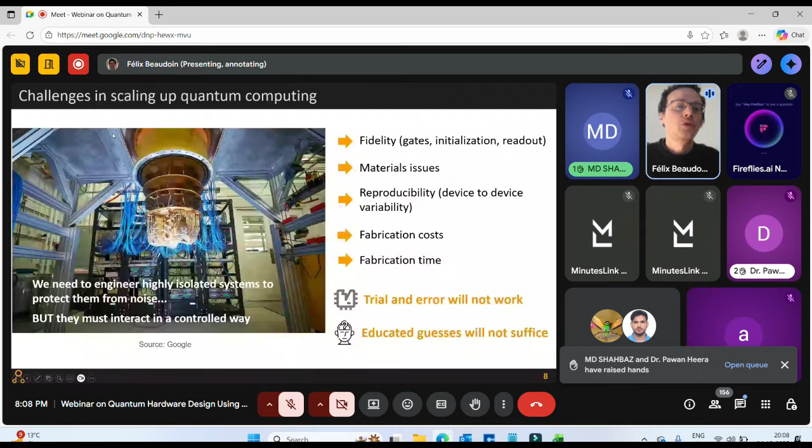So that's a very difficult engineering challenge. Our vision is that computer-aided design software can help to get there, just like in classical electronics industry, where engineers have been using TCAD, technology computer-aided design software, for decades.

In TCAD, the idea is to start from a real device that is industrially relevant, such as a MOS device, create a 3D model with an arbitrary topology, and solve some classical or semi-classical physics models to get experimentally relevant performance metrics, such as an IV curve for a transistor.

In quantum technology computer-aided design, so QTCAD, we again start from a real device that is industrially relevant. It could look very much like a transistor. In fact, spin qubits are fabricated with the same techniques, but now we need to solve for much more deeply quantum mechanical models that include entanglement, superpositions, and many other phenomena that are absent from conventional TCAD software.

And then the users, at the end of the day, will care about very different performance metrics. They don't necessarily care so much about current voltage characteristics, but they care a lot about how fast can I do a quantum logic gate. So can we model Rabi oscillations, for example, in these TCAD software?

So the idea here is that conventional TCAD software, while excellent for its applications, is not suitable for quantum hardware design. So we have to develop new software capabilities to really accurately model the performance metrics that matter to quantum technologies.

So our competitive advantage as Nanoacademic in that respect, we think we have three main broad categories of advantages. The first one is we developed our own adaptive meshing algorithms. This is true in many TCAD software, but to achieve user-defined accuracy targets.

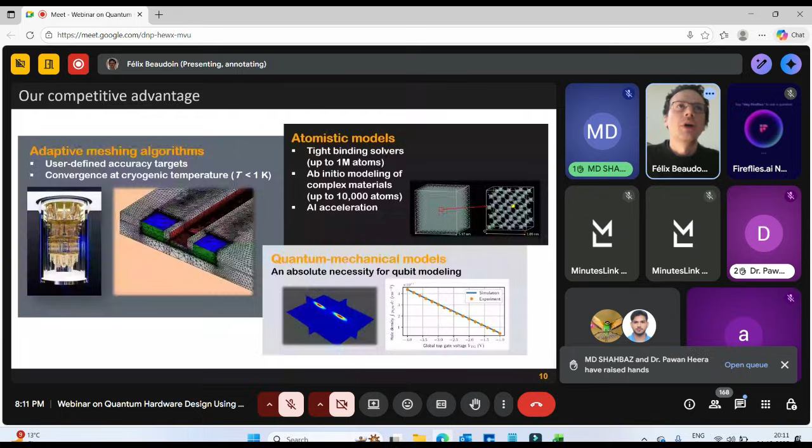And the final competitive advantage is we have these quantum mechanical models that are encoded directly into QTCAD that are absent from conventional TCAD software. That's an absolute necessity for qubit modeling. So with this introduction done, I would like to describe some use cases of QTCAD.

First, who are our users and collaborators? We have users, typically scientists and engineers in academic, government, and industrial environments. We developed QTCAD thanks to several R&D grants from the governments of Canada and Quebec here. And we have R&D partners and customers across North America, Europe, and Asia.

And we also collaborated with the National Research Council in Canada to develop a lot of QTCAD and QTCAD use cases. So we have commercial users of QTCAD from industry and academia since 2023. And of course, for our DFT software, this is a much longer story that dates back to 2007 or 2008, the foundation of the company.

There's a growing list of publications using QTCAD. You can find links to those publications on the Nanoacademic website. Some of the publications come from ourselves, but in the last year, actually, our users got better than us at publishing. So with QTCAD, they now have several publications in high-impact journals such as Physical Review Letters or Applied Physics Letters or PRX, Nature Communications, Scientific Reports.

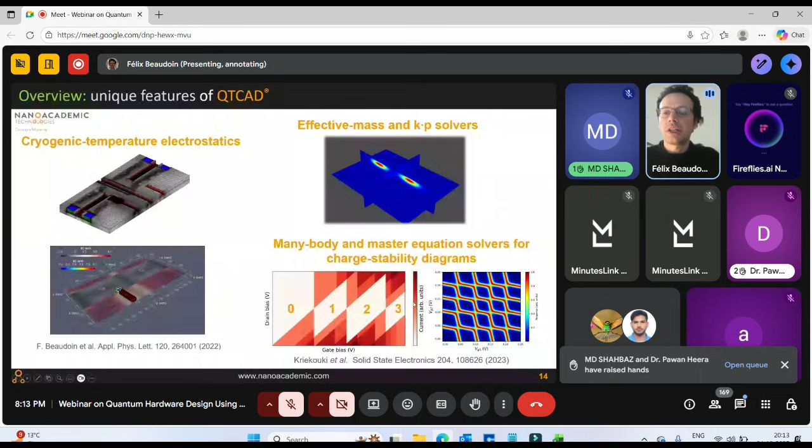We have many-body and master equation solvers for charge stability diagram calculations to evaluate if certain gate bias configurations and geometries are able to capture 0, 1, 2, or 3 electrons, for instance. We have a valley coupling calculation feature, which is absolutely important for silicon-based quantum dots, advanced spin physics, quantum well physics, and a Rabi oscillation module to predict how fast quantum logic gates can be done in a given system.

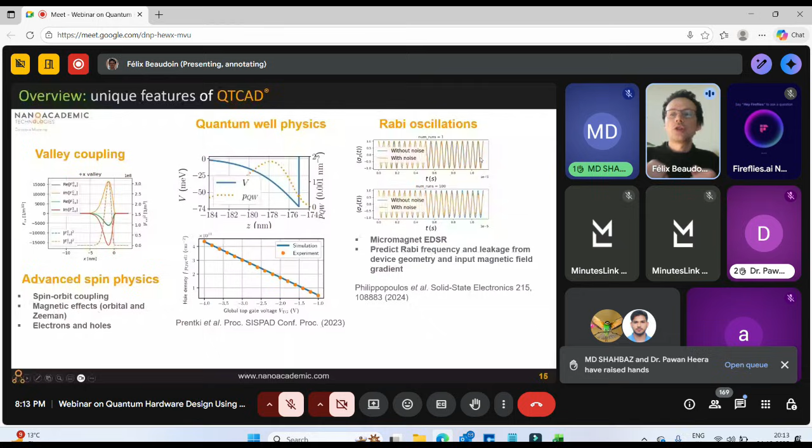We also have, for double quantum dots or multiple quantum dots, the capability to calculate the strength of tunnel coupling and exchange. These are resources for 2-qubit gates in particular, or even single qubit gates in some exchange-based spin qubits. So that's very important in order to assess how fast a quantum computer could be based on spin qubits.

We have a non-equilibrium Green's functions module to calculate tunneling, sequential tunneling currents through quantum dots, and many additional features.

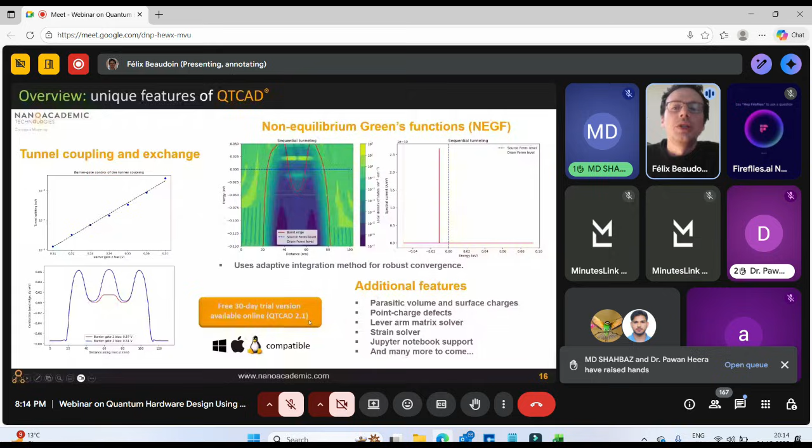Since QTCAD 2.0, we also support atomistic simulations directly in QTCAD for specific materials, namely silicon, germanium, silicon oxide, silicon germanium alloys. We'll add materials as we keep developing the software.

But the idea here is that we're able to do multi-scale simulations where we use continuum models to model the electrostatics of the device at the micron scale. But at the nanometer scale, we can zoom in the quantum dot region and model the quantum dot atom by atom and find the electronic structure of the quantum dot with atomic resolution.

And this is absolutely crucial to study accurately valley physics, spin-orbit coupling, g-tensor calculation, strain, and eventually shuttling calculations, and device-to-device variability phenomena arising from rough interfaces, random alloying in those devices, and also some potential for individual dopant impacts.

So this will be extremely important as the spin qubit technology evolves and scales up, because these device-to-device variability effects are an obstacle to scaling. So studying them with computational methods is absolutely crucial.

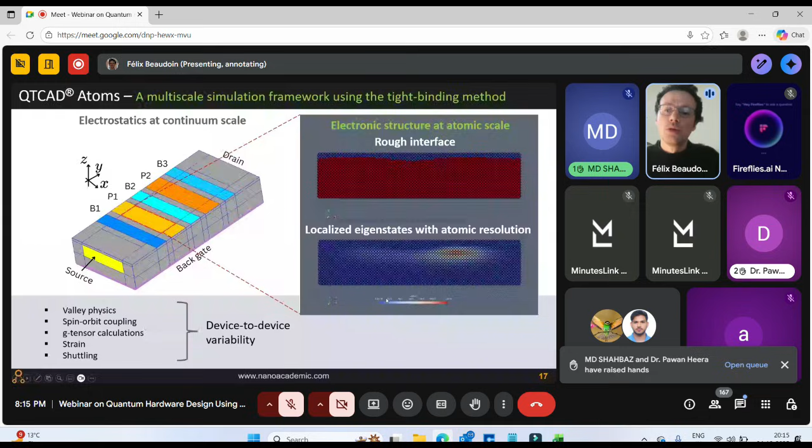When it comes to superconducting qubits, it is possible since QTCAD 2.0 to model superconducting circuits using QTCAD. We will see an example in this presentation. We can do capacitance matrix and Maxwell eigenmode calculations, but also with NanoDCAL and RESCU, it is possible to do atomistic simulations of Josephson junctions.

So because we can handle both the atomistic scale and the macroscopic scale of capacitors and resonators, we have the capability with Nanoacademic software to calculate all parameters, capacitance matrices, Maxwell eigenmodes, couplings, Josephson energies, all relevant parameters that come into the Hamiltonian that describe superconducting qubit QPUs. Once these Hamiltonians are obtained, it's possible using open source software such as scqubits or QuTiP to calculate chip performance figures of merit.

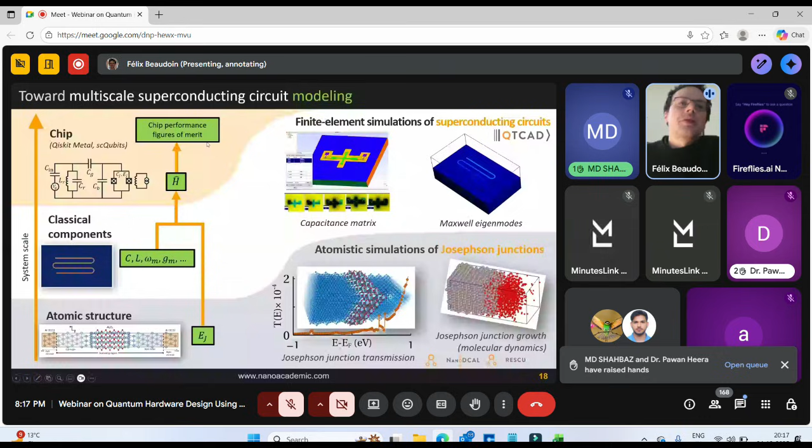I'd like to go into more concrete use cases. Last year at the March Meeting in Anaheim, our users Equal1 announced that they had built this new quantum computer called Bell-1, which contains a 6-qubit QPU, and this was operated live at the March Meeting. The computer is small enough to fit in a standard data center rack and can plug in a standard 120-volt outlet, which makes it unique. Very few quantum computers can be operated this way.

And I'd like to mention, it's now a preprint, but we hope it will be published very soon. If you go to the preprint link and you look at figure 1, the way they explain how the quantum chip works is partly thanks to a QTCAD simulation. So this is proof that they're using QTCAD in their day-to-day design of chips that go into actual quantum computers that are now commercial.

I'd like to mention another concrete use case from Equal1 again. This is accepted in Scientific Reports. The manuscript is available and will be officially published, I think, in a matter of days. The same company studied GlobalFoundries 22 nanometer fully-depleted silicon-on-insulator technology. Everything was fabricated by GlobalFoundries with standard techniques, but the topology was modified to create a quantum dot array.

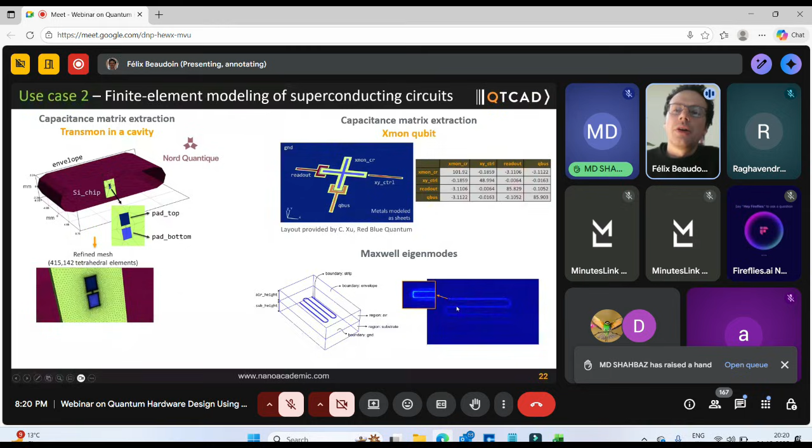We did a similar capacitance matrix extraction for an Xmon qubit provided by another Canadian company called Red Blue Quantum. And we also did Maxwell eigenmode calculations. So in the hands-on session, I will show you how to do this kind of calculation with QTCAD and Qiskit Metal, which is a GUI for those kinds of superconducting qubit simulations.

I also want to briefly mention that QTCAD is used not only in research and engineering, but also increasingly in education. We have educational licenses available, and this has been used in teaching at Politecnico di Torino in Italy, and more recently at University of Toronto in an electrical engineering class on quantum hardware design.

So let's go into the more live demonstrations. Spin qubits in semiconductors first. We will concentrate on a simplification of an FDSOI device to make the simulations run faster and make the presentation more pedagogical. How this will work is we will start from a layout that describes the structure. So I'll open the layout in KLayout. We have it here. There are multiple layers that define the structure. I will hide some of them.

First, the domain. This is just a rectangle that describes the simulation domain. So you can see the dimensions here. It's in the hundreds of nanometers, about 100 nanometers. And this is, of course, a subset of the full chip, but we're interested in the region where the quantum dot is going to be formed. There will be a film layer, which describes 4 regions. Here's the source, the drain, the channel, and the shallow trench insulators on the sides.

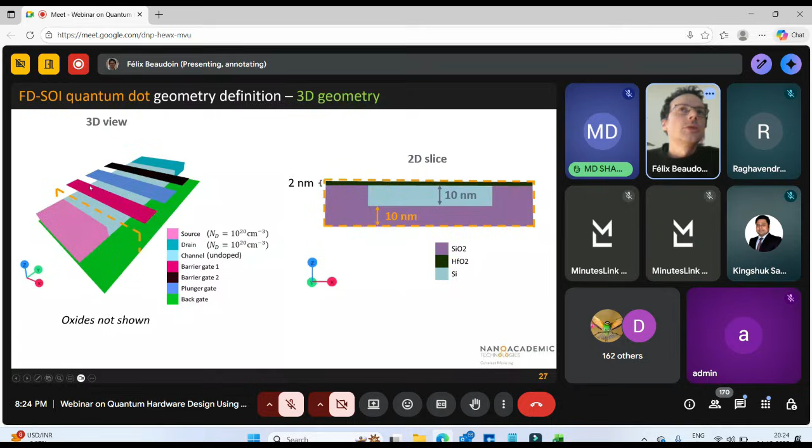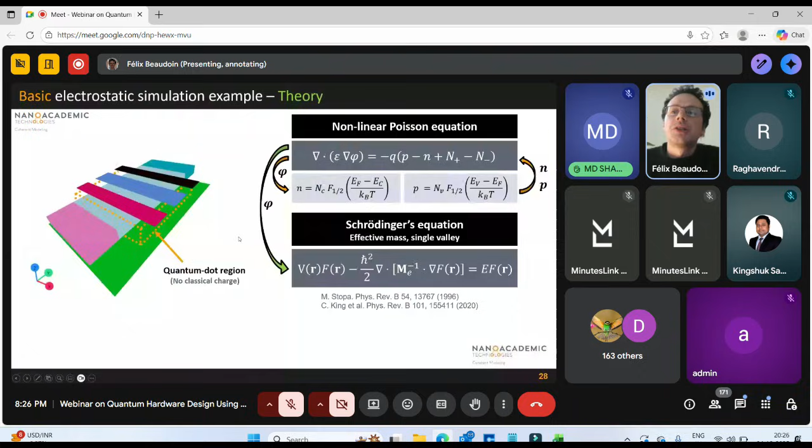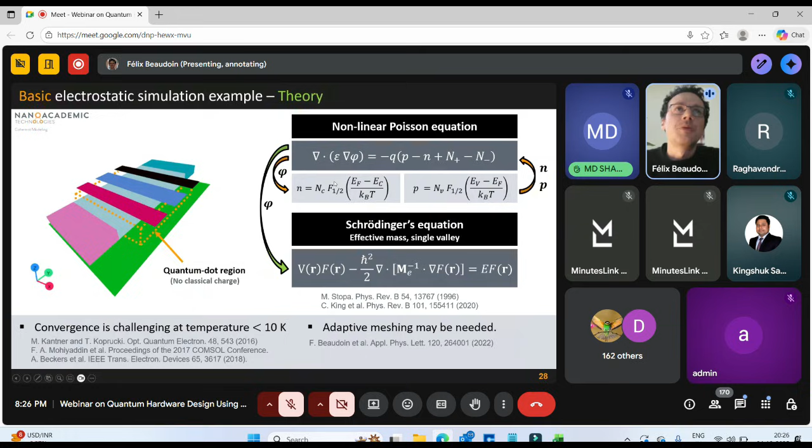This is a notoriously difficult problem to solve because the nonlinearities associated with the electron and hole charges are much stronger at cryogenic temperatures. So adaptive meshing may be needed for robust convergence, and that's something we describe in this paper. So that being said, let's jump into the code and do the demo.

So I'm going to open this interface to one of our workstations at the company. Here I'm showing.

Excuse me, is someone asking a question? There's someone whose mic is open, I think.

No? Okay. Thanks. So we have 3 Jupyter notebooks open here. So I didn't mention it in the slides, but QTCAD is controlled through a Python API, and the most pedagogical way to teach how the Python API works is through Jupyter notebooks, which are interactive.

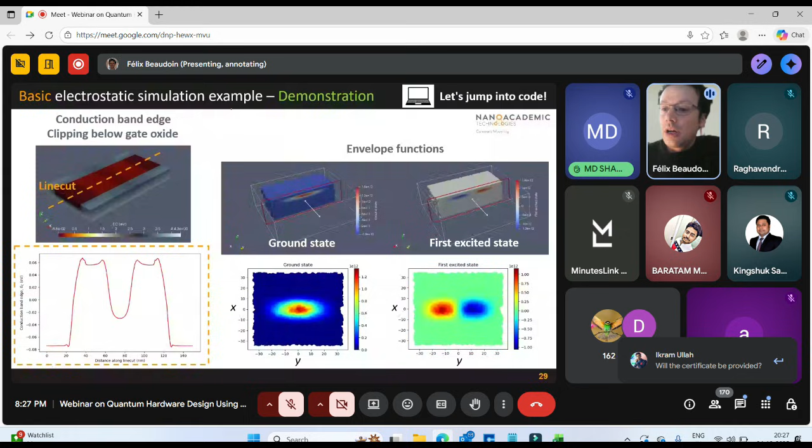Yes. Yeah. Okay, perfect. Thanks a lot for letting me know. This would have been embarrassing if I kept talking.

Okay, so we have these 3 notebooks. The first one here, Generate Mesh, is going to be about generating the 3D structure that I just described. The second one is going to be this Poisson and Schrödinger simulation. And the third one is going to be the lever arm calculation.

We won't have time to go through the whole thing, but please feel free to reach out if you want the notebooks. We can provide them, no problem. And this is how to get these lever arms for their own more complex device. So how does this work? So we already looked at the layout.

And here we're going to use a new feature of QTCAD that was just released last week, which is QTCAD Builder, which is an automated way to create 3D structures in a scriptable form from layouts directly. So we're going to import Builder, and we're going to set some paths to an OASIS file that contains the layout, and paths to output mesh and geometry files that we will produce thanks to the layout.

We'll also define the growth axis dimensions. So the gate oxide thickness is going to be 2 nanometers. The film thickness, where the quantum dot will be, 10 nanometers, and the buried oxide thickness will be 10 nanometers as well. We will define a basic mesh characteristic length, which will be very coarse to start with, because we'll start with a coarse mesh and then refine using adaptive meshing. A coarse mesh with 10 nanometer characteristic length.

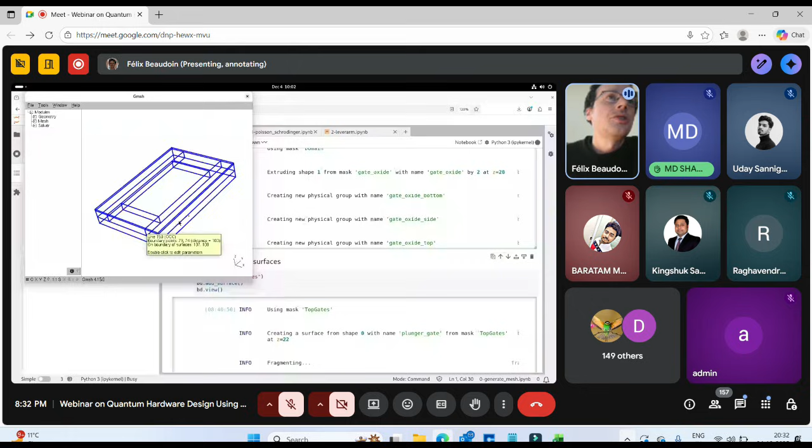So what I will do is I'll do mesh in 3D tools, options, and I will show the 2D element faces, so you can see different colors for the various gates on top. Okay. We can also add the back gate. The back gate is the size of the domain, so we're going to use the mask domain. We're going to set the position at which to apply the back gate at 0, which is where we started along the z-axis. And we're going to copy the mask called back gate and add the surface.

And finally, we can mesh, save, and visualize the final result. So we have this 3D structure and 3D mesh for our FDSOI quantum dot. I'd like to mention we only use the most basic feature of Builder, extrusion, but Builder also supports etching, growth, and many other 3D operations. So fairly complex geometries with overlapping gates can be made now with Builder.

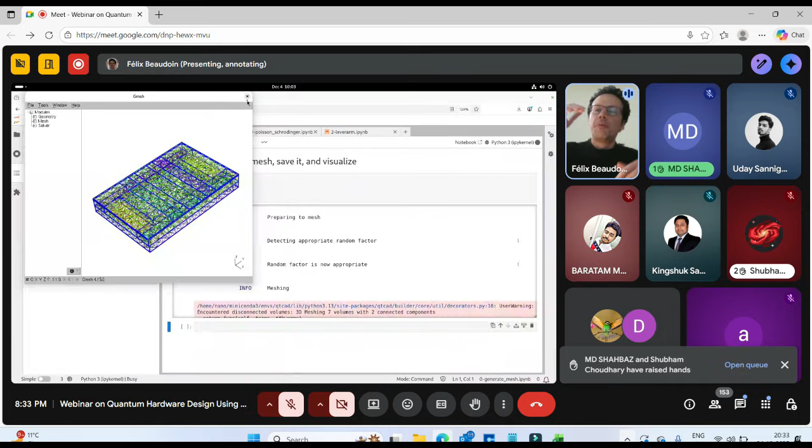After creating the 3D structure, it's time to solve the electrostatics of the structure. We're going to go into this second notebook. We will import basic QTCAD modules such as physical constants, materials module, analysis tools to plot, input and output tools to save and load files, mesh modules, device class, which is used to define the physical device with various materials, various boundary conditions on the mesh, solver classes for Poisson and Schrödinger solvers, and also solver parameters classes to tune the parameters of those solvers. So we import all this, and then we will set up the device.

So we have gate biases. I mentioned already all of those electrostatic gates. These define the voltages; these are simply variables that we can change later on. So they define the biases in volts. I will define paths to the mesh, the geometry, and output files. And then we can load the mesh using this capital Mesh command. So this is a class. We're creating an object called mesh. We're setting the characteristic length of the mesh, so the units of length, to be 10 to the minus 9, so one nanometer. And then we load the mesh from the path. So we can see the mesh characteristics here. For example, the total number of nodes is 1,000. So that's a very coarse mesh to start with.

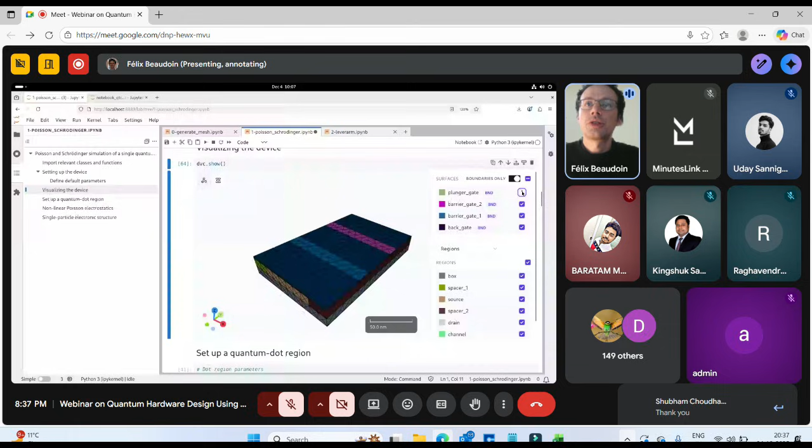So I'm going to show the boundaries. We have the plunger gate boundary. We can make it disappear and reappear like this. We have barrier gate 2, barrier gate 1, and the back gate at the bottom. And then we can also hide and show various regions based on their labels. For example, the source. But we also can toggle between materials. So I can decide, for example, to hide all the oxides. And then we can clearly see the silicon source, channel, and drain, and the gates that are going to be used to control the quantum dot electrostatically.

The next step is to set what we call a quantum dot region. We want this region to be somewhere in the channel below the barrier gates and the plunger gate. What do we mean by the quantum dot region?

It is a region in which we will remove all classical charges because we want to model these charges quantum mechanically using our Schrodinger solver. It is also a region where typically we want a finer mesh. So how do we set this up?

We use this channel equals submesh command to grab just the channel region, but we want not only the channel region, but a part of the oxide that wraps around the channel, because we want to model quantum confinement arising from the band offset between the silicon and silicon oxides.

So what we do here is we grab the channel and we define XYZ coordinates of the channel corners, and then we expand by various buffers to take into account the oxides. Once we have defined this dot region, let me make sure I ran these cells properly. I'm going to run these two.

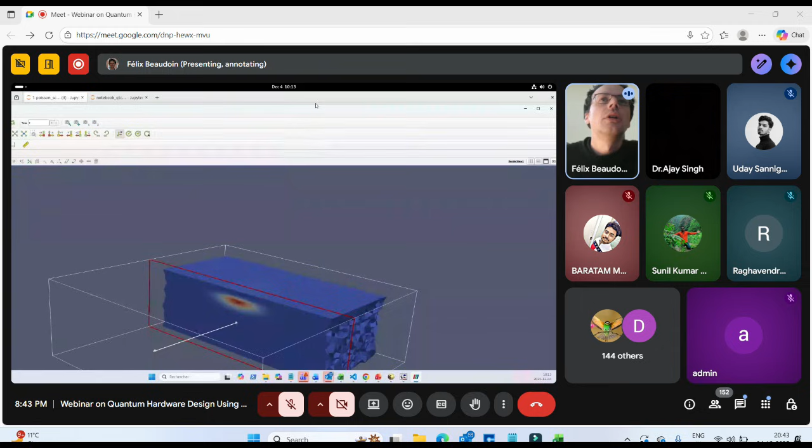And then we can save the wave functions in VTU format and visualize the wave function in 3D, in ParaView. So here I'm showing the ground state wave function in the quantum dot region.

I can switch and also show the first excited state, for instance, which is along another axis. So what I'll do, I'll show the second excited state. Actually, they're both on a different axis. So let's do the first excited state. We're going to do a different clip.

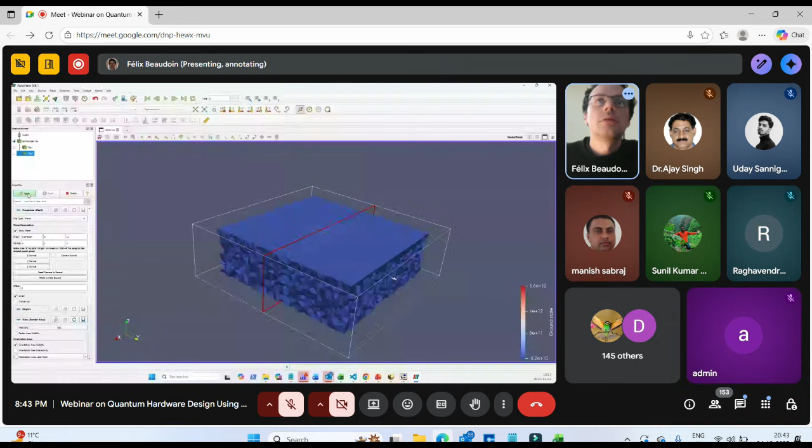We're going to clip along the Y plane, apply, and then show first excited state and second excited state. We can also plot slices inside the notebook for these states in the channel plane.

Before I jump into superconducting qubits, we have a notebook also for lever-arm extraction. We have notebooks for Rabi oscillations and many other steps. What I wanted to show here is that by sweeping plunger gate biases, we can get the behavior of the energy levels as a function of the plunger gate bias, and extract a lever arm of 0.86 electron volts per volt. This is very similar to the calculation done in the earlier use case, but for a slightly simplified and different geometry.

This being done, I have some time remaining to describe the superconducting qubit solver.

I will need to go a bit faster because we have only 15 scheduled minutes. What I want to say is that we have an interface with Qiskit Metal, which contains a GUI. We have a new tutorial, a notebook that is available on demand but not on our website. Please feel free to reach out if you want it. What we will do here is model a qubit coupled to a microwave resonator.

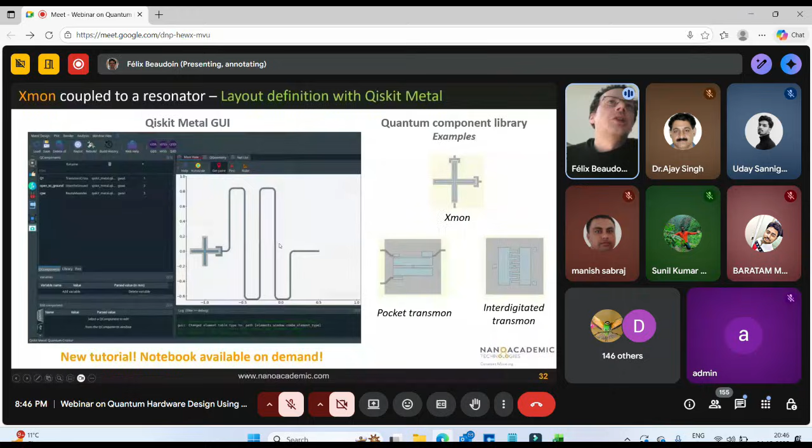But Qiskit Metal does not do the simulations by itself. It needs renderers. There are multiple renderers, but we developed a QTCAD renderer recently. It is now available, and we will do the simulation of the Xmon coupled to a resonator. We will calculate the so-called capacitance matrix, which is very important to calculate the charging energy of the transmon.

So this here is the transmon Hamiltonian. There are two main parameters, the charging energy and the Josephson energy. Josephson energy is typically given as a boundary parameter. People fab the Josephson junctions and measure EJ and tell you what it is.

But we can also model EJ using NanoDCAL. If you're interested in this, please reach out to us. The charging energy is obtained from the capacitance matrix calculation. It is defined as E squared over 2 times CT, where CT is the total capacitance.

In this specific example, this total capacitance is given by a formula in terms of various components of the capacitance matrix, which will be calculated in the tutorial. Knowing the charging energy is very important because, along with the Josephson energy, it defines the energy splitting of the qubit. In fact, it defines the whole transmon energy level spectrum.

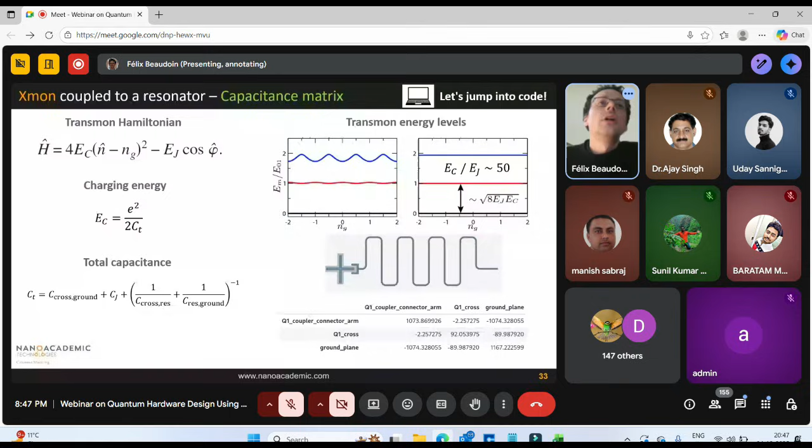So let's go into the notebook, which is in a different tab. The notebook is fairly detailed.

It describes what Qiskit Metal is and describes the physics of the structure. Let me scroll down. There's a preamble in which we can load all of the relevant Qiskit Metal modules and QTCAD modules. I will run this cell.

We can define a name for the simulation. We can set the number of Maxwell eigenmodes to compute — I will go back into Maxwell eigenmodes later. We can set relative tolerances for the capacitance and eigenmode extraction; these are set fairly high in the simulation so it can run faster. We can set minimum and maximum characteristic lengths of the starting mesh and say we want to use adaptive mesh refinement.

We can set the paths to the output directory, geometry file, and mesh files that we're going to save, and instantiate a design object that will be used by Qiskit Metal. As mentioned, Qiskit Metal has a GUI, but also a Python API. In this notebook, we define the quantum components, Xmon, resonator, and their properties and geometry, entirely using dictionaries.

But I will show you that this can also be done in the Qiskit Metal GUI by launching the GUI. So this is what it looks like. You have various components: qubit 1, which is here, a coupler between qubit 1 and the meandered resonator, a connection between the resonator and the ground, and the coplanar waveguide resonator itself, defined here.

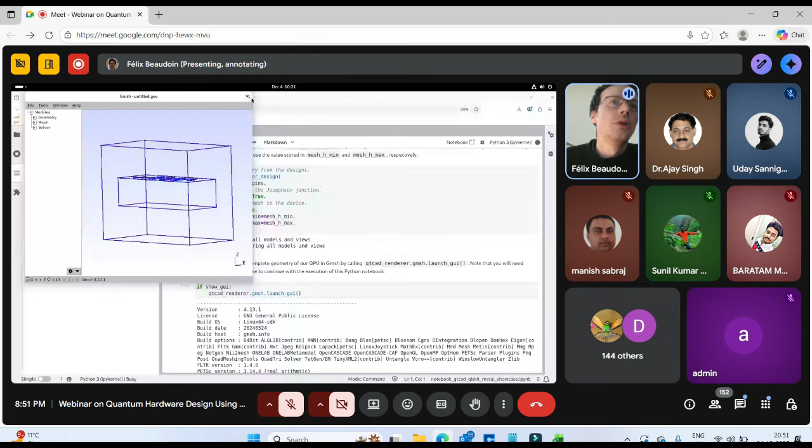Once this is done, it's possible to mesh the device and show it. It's not very necessary because we won't see much when the mesh is on top of everything, since our device is inside. And to do the capacitance extraction, how is this done? Very simple.

You can export some parameters. That's an optional step, actually. The most important part is just this: QTCAD renderer dot run QTCAD, and solve for capacitance.

This is a lengthy calculation, so I will not run it live. On this machine, right before the meeting, the calculation took about half an hour. This is because the model is fairly complex with lots of meanders and everything, and we use adaptive meshing, so we refine progressively here 7 times to achieve the required tolerance.

Finally, I'd like to quickly show you that it's possible to also do Maxwell eigenmode simulations with QTCAD. Why is this useful? Well, the Maxwell eigenmode can tell you about the qubit frequency and the resonator frequency. So here in this design, we're solving Maxwell's equations in the frequency domain using QTCAD.